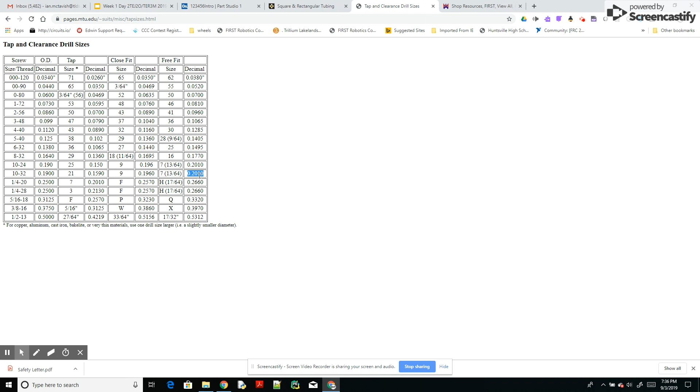There's a great website for tap and clearance drill sizes, so I can check that if I want to put a 10-32 screw in, it needs to be 0.201 inches in diameter.

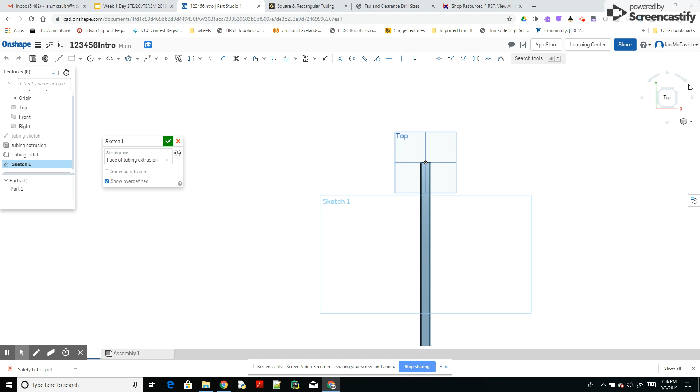So here's what I'm going to do: I'm going to select this face, and then select sketch, which will allow me to create a sketch using this face. Now I'm just going to rotate my view a bit here and zoom in.

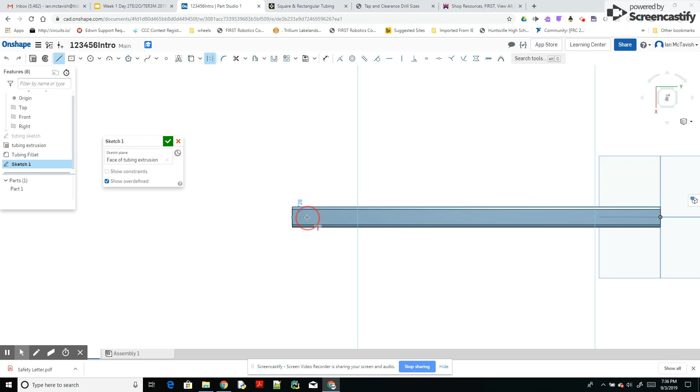I'm going to take that point right there and create a line and a construction line. When I hold my mouse over that center point, I can do it—you can see, because I've rotated my view, I'm going vertical, but on the screen it looks horizontal. I want a hole 0.5 inches from there, so the construction line tool allows me to set geometry so I can position things.

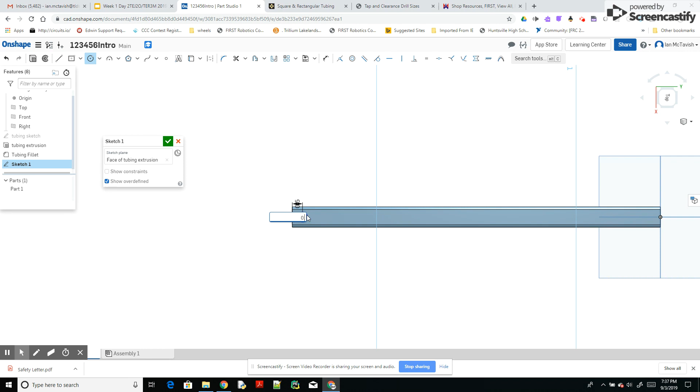Now I'm going to pick the center point circle tool and draw a circle, typing 0.201 inches, and there's my circle. I'm going to rename this to hole sketch so I know that it's the holes.

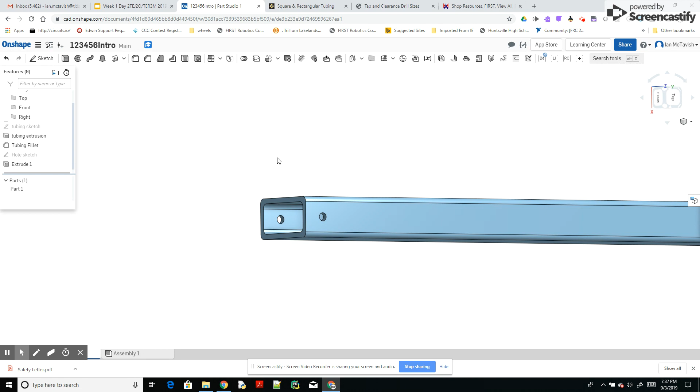Once I've got that hole in there, now I can do my extrude. I'm going to select the hole and select remove. This is where it gets useful—I'm going to select through all, which lets me cut through, and you can see as I rotate that my hole goes all the way through. So there's my hole.

The one thing I want to do now is go back into my sketch, because the reason I do this on the computer is so I can take a linear pattern and apply it to that hole.

I only want one in this direction—whoops, I'll double click that. Oh, I'm hitting the wrong button, sorry about that. So I only want to go one that way, but this way...

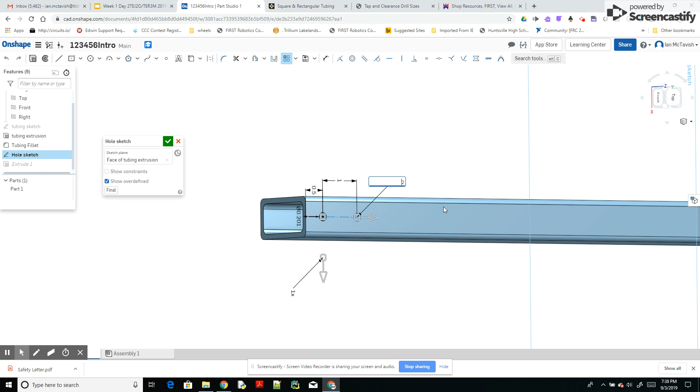I'm going 18 inches, spaced every half inch. If I just do 18 times 2, that should get me all the way to the end of the thing, and I want 0.5 inches spacing.

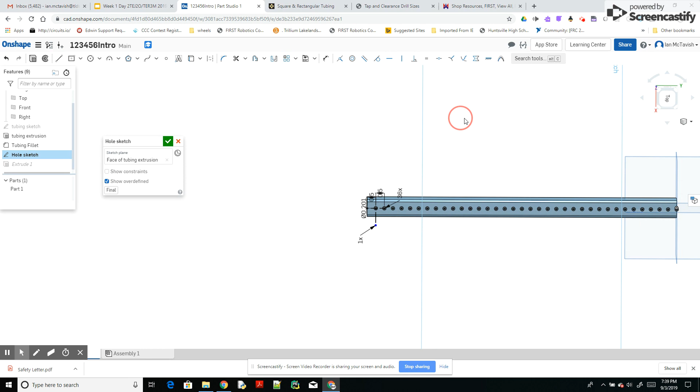You can see it's put it in all the way. I did it for 36, but I actually want 35 so that I'm not going over the edge right there.

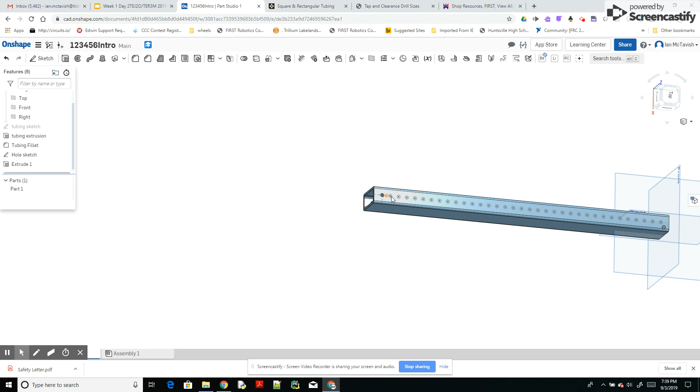So if I update my whole sketch, I should... I'm going to need to update my extrusion. There is a way that you can do that pattern so you don't have to go and click all of the individual holes.

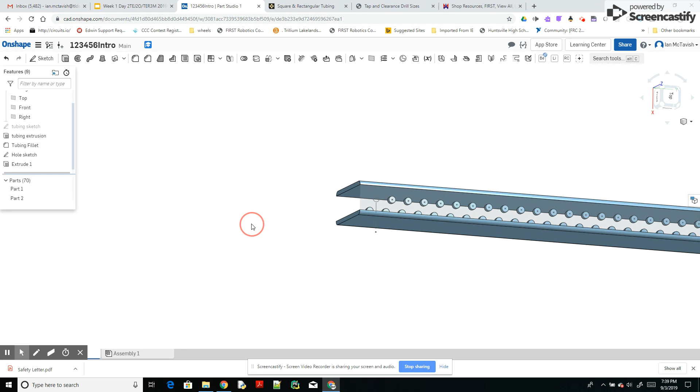As you can see, I've messed up—I've actually created a hole where the thing is, but not that. So the bonus is when you make a mistake like that, you can go in and fix it. That's the challenge: to fix this up so that I've got holes all the way across.